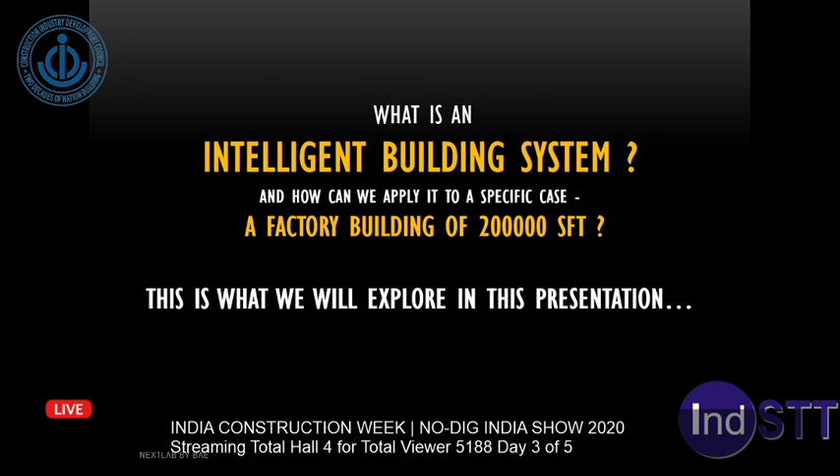Digital can be either operational or strategic. Operational is when we make small changes using digital technology in areas of rate analysis and quantity surveying or document management by having an ERP, etc. Or it can be digital which is the intelligent building system, a product of strategic transformation initiative.

And of course, with all things digital, even for IBS, data is king. For IBS to be created, we'll need to acquire, store, visualize, analyze, and process the data to create a rationale for engineering outputs that will be beneficial for the industry.

With an IBS, we can help construction companies save resources and increase productivity and improve project profitability and quality, reducing project duration and cost, lessening the complexity of project management, and enhancing site safety for promoting a sustainable development of the construction industry.

To understand digital transformation and IBS, therefore, it's necessary for us to take a look at where we are at the value chain of the industry and how the digital transformation is going to completely disrupt each link of the value chain.

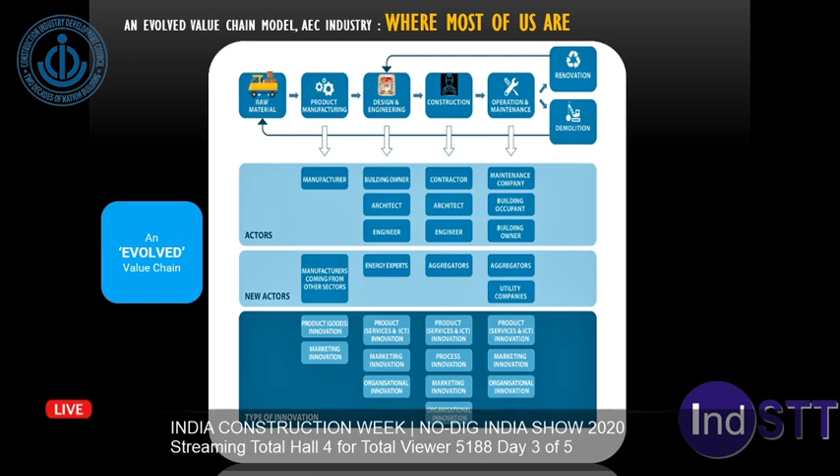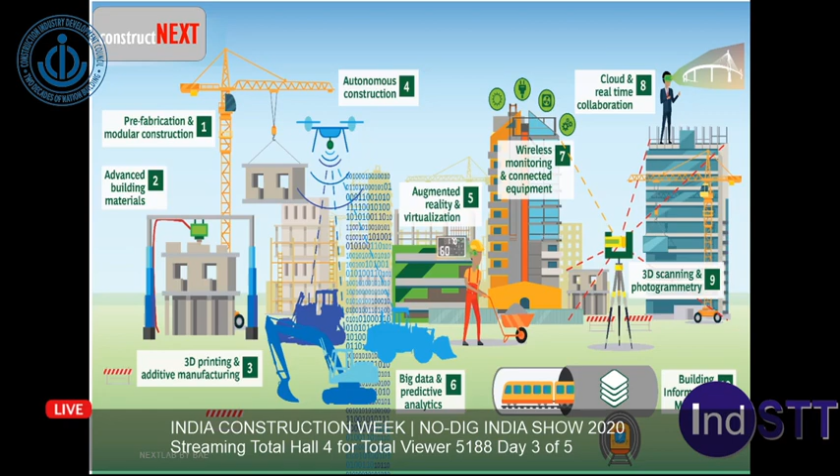There is prefabrication and modular construction, advanced building materials, 3D printing through additive manufacturing, autonomous construction, augmented and virtual reality, big data predictive analysis, wireless monitoring and connected equipment, cloud and real-time collaboration, 3D scanning and building information modeling, which will all contribute in no mean way to disrupt, create change in various aspects of the building industry, as you can see in the illustration.

Every man, machine, resource, component, building system, equipment that you saw on the slide earlier is a thing as defined in the Internet of Things.

So now that we have a brief introduction to what we are trying to achieve, let's create a conceptual framework for the IBS and design an implementation strategy for making it effective across companies and across verticals.

Many of the big five consultants, such as the Boston Consulting Group, have embarked upon very ambitious strategic transformation initiatives using digital technology. We have drawn from companies such as McKinsey Global, Boston Consulting Group, etc.

We used a very popular strategy implementation tool called the balanced scorecard, and used it to create our own version of a value chain transformation scorecard to determine how companies can, in a step-by-step manner, identify key objectives and convert those to measurable outcomes and performance drivers, creating a measurement scorecard for implementing a digital transformation strategy across their companies.

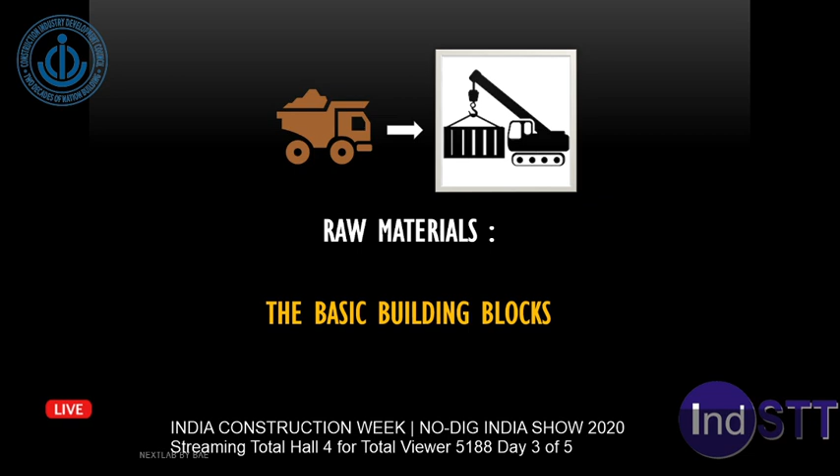As we said before, each link in the value chain undergoes a rampant digital disruption. We'll just look at the raw materials only because we don't have too much time, so we'll skip the other links. Let's look at the raw materials, the basic building blocks, and how digital disruption causes transformation in the raw materials and product manufacturing link of the value chain.

So how is the raw material link going to look in the near future? This is the raw material and product manufacturing component of the value chain, which is said to be disrupted due to Industry 4.0, digitalization, and various kinds of innovations from the various stakeholders.

Time is not very far when you and I will go to a supplier and ask for 10 footings, 20 beams, 10 girders, and so on. We have today prefabricated RCC components, bath pods, factories in a box, all created by new actors who want to shorten the time of construction in societal interest and increase the profitability and productivity of the industry. We're also converting these prefabricated components to smart construction objects, or SCOs, as we'll call them in the rest of the presentation.

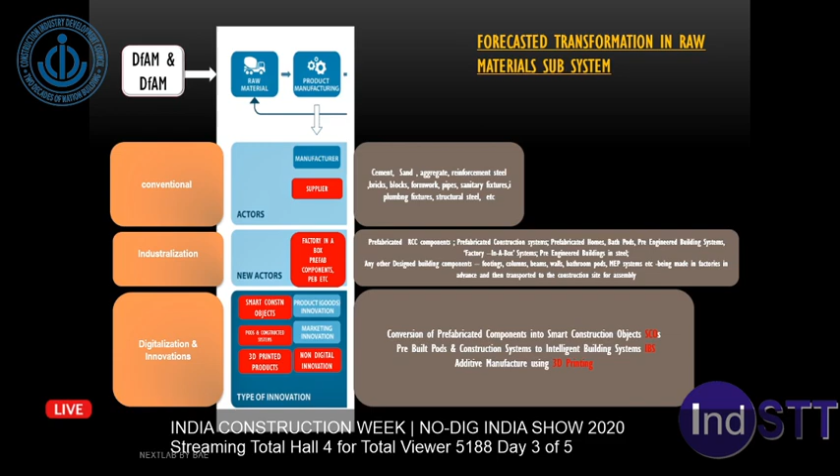Pre-built pods and construction systems are being converted to intelligent building systems using technologies like additive manufacturing or 3D printing to create holistic solutions within a matter of days as opposed to years or months.

The designers have to keep pace as well. Cement, sand and aggregate have transformed into bathroom pods and pre-engineered building systems, etc. So they've got to innovate and engage in the transformation through DFAMs - design for assembly and manufacture, and design for additive manufacturing.

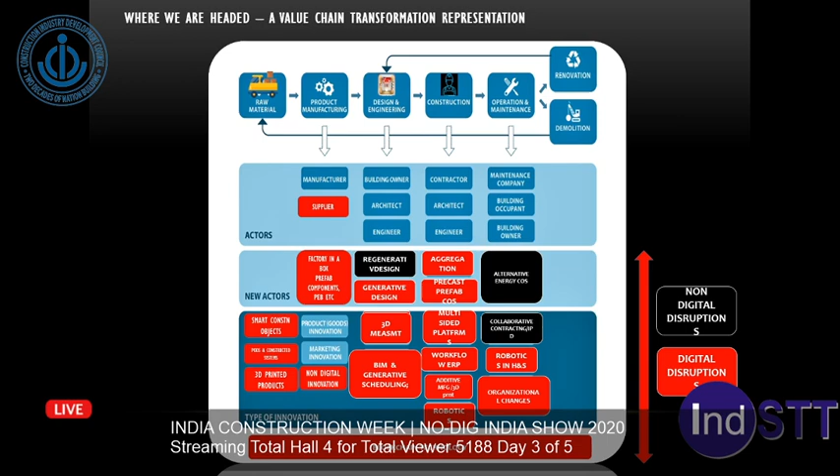Similarly, with digital revolution impacting all the other links in the value chain, the combined value chain of the industry would begin to look something like this. This is the value chain illustration of where we are going to be pretty soon - changes, disruptions, transformations across all the links: raw materials, product manufacturing, design, engineering, construction, operations, renovation, demolition, etc., through digital as well as non-digital disruptions.

We have so far rationalized the need for adopting digital technologies to transform our industries, our companies, our projects. Let's now look at this process of creating an intelligent building system for prefabricated buildings in stages through the following slides. Let's look at the stakeholders and also how this presentation is going to be organized hereafter.

First, a quick look at how the study is organized. First, we'll look at the technologies that are available to us. Then we create a conceptual framework of the intelligent building system. Next we create an operating framework for the intelligent building system, and then thereafter an implementation framework.

The implementation framework is across two different prongs. The first prong is a technology or technical prong. The second is a management prong, which enables you to outline the key objectives and draw the outcome and performance driver measures to ensure that companies take the transformation strategy seriously, and every department, every person in the company is measured in terms of how they are performing with respect to contribution towards digital transformation.

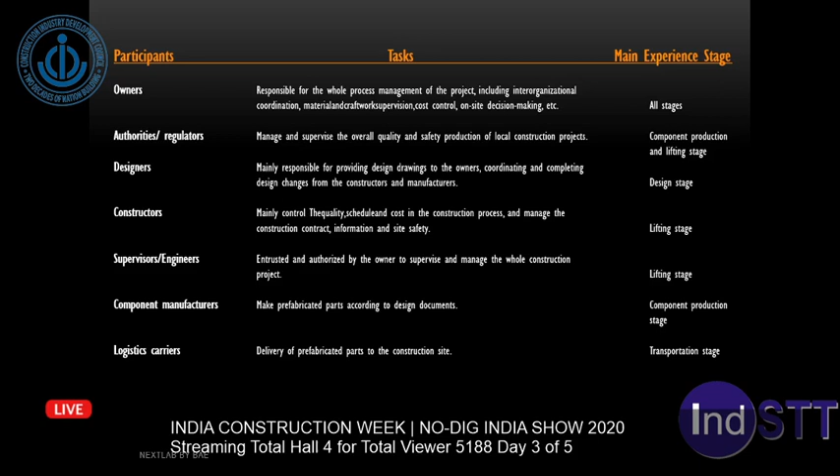Here's a look at the stakeholders involved in a prefabrication setup, the tasks or responsibilities they discharge, and the main stages where they will experience the impact of digital transformation through the execution of a particular project. So there are owners, authorities or regulators, designers, constructors, supervisors, engineers, component manufacturers and logistics carriers.

With so many stakeholders and so many possibilities of systems and subsystems, what are the digital technologies to be employed? In a prefabrication facility, prefabricated components are manufactured, such as footings, columns and beams. Components are then assembled into construction systems - this is the assembly level, the earlier one was the unit level. Then the constructed systems are integrated into the construction sites - this is called the integration level. There are three levels in a prefabrication facility.

Let's take a quick look at the different technologies involved at the different assembly levels. At the component level, we use IoT, RFID and GPS to track and position the raw materials and components in construction. At the system level, where components are assembled into systems, we use IoT and a BIM platform to trace the manufacturing process, optimize the manufacturing schedule, and analyze and arrest quality problems. At the construction site level, we have a concept of smart construction site by employing technologies of internet, 3D scanning, BIM, virtual reality, augmented reality, IoT, etc.

And through a BIM based field management model that keeps talking with the BIM platforms of the manufacturers and the contractor subsystems, we create a digital twin which has the same properties as the construction site.

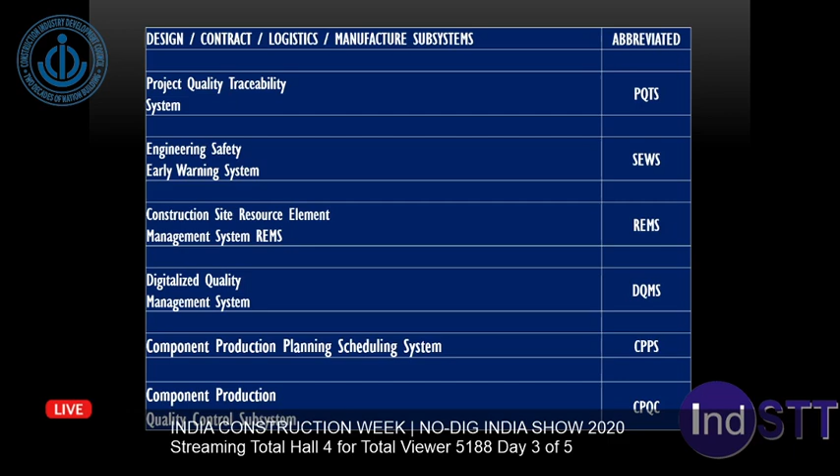A few more of those subsystems: material supply management, SCM, of the logistics operators and manufacturers; component transportation and dispatch system, CTDS; and the integrated design system of the designers, IDS, which subsumes the building information modeling system.

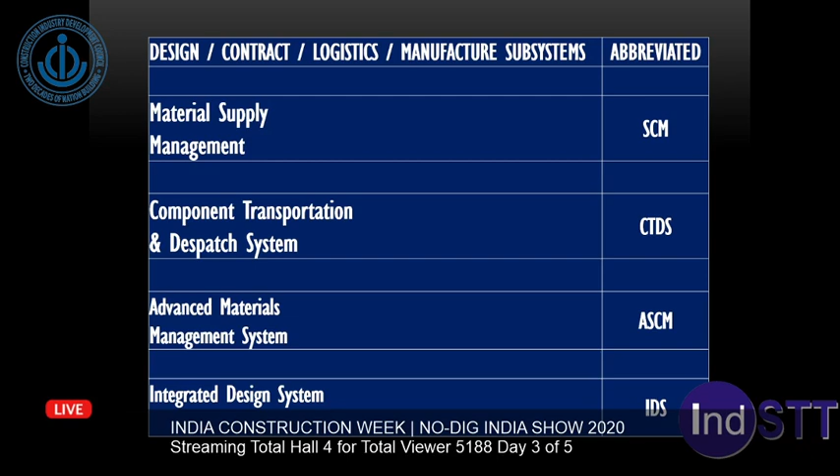In summary, therefore, the various systems employed along with the subsystems of the contractors, designers, and logistics operators would look like this.

We have PIC, IBDB, AMTS, and ISP, and a suite of subsystems running across the manufacturers, suppliers, designers, etc., compiling the big data we need for the creation of the intelligent building solution.

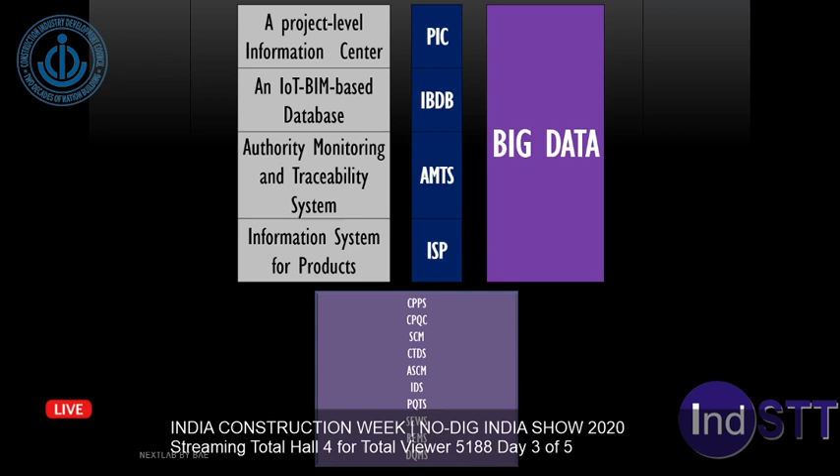Now that we've seen all this, let's take a quick look at the conceptual framework of the IBS. Here is how a conceptual framework of the IBS would look like.

As you can see here, the various systems — AMTS, IBDB, ISP, PIC, etc. — that we've seen earlier are depicted here, indicating very clearly the flow of data and information between the subsystems of the contractors, the authority regulators, and the owners.

The various purposes for which these systems are in place, and the roles and responsibilities of each set of stakeholders, are also loosely indicated here.

The objectives of lean construction — maximizing benefits, supervising and control, safety and quality control, and quality traceability, etc. — are very clearly indicated in this conceptual framework of the IBS.

The interaction between the project information center and the transmission of information back and forth across these different systems and subsystems, through networks of Wi-Fi, RFID, etc., is shown here.

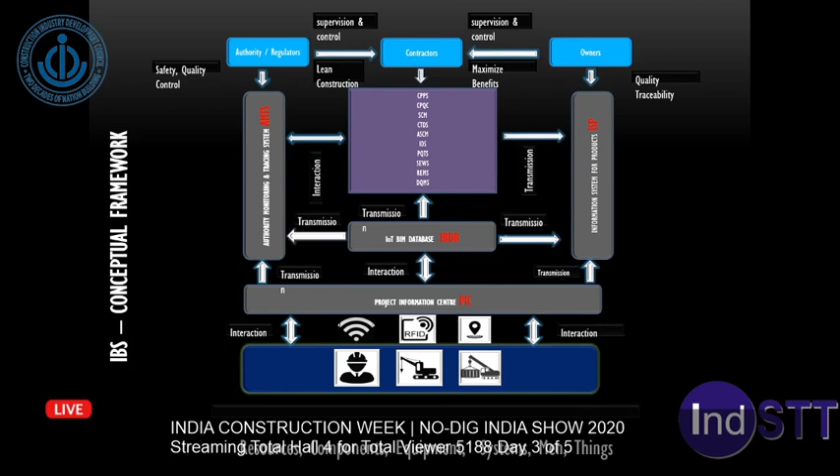And finally, the benefit to the construction site's resources, components, equipment, systems, men and things, etc., is also clearly indicated. So this gives you a basic or conceptual framework from which to develop an operating framework, and we'll see that in the next slides.

Let's take a look at what happens in the IBS operating framework. We create a design model subjected to analysis and clash detection, etc.

Once found compliant, a set of data is transmitted to different frameworks and sub-frameworks. So a construction-oriented design data is transmitted for on-site construction.

On-site construction data integration happens through the network of RFID, IoT, sensors, etc. A set of manufacturing-oriented design data is sent to component production data integration.

Component production happens in real-time, and data is uploaded back into the system. If it is qualified, it goes to the site for on-site construction data integration.

The data is analyzed and quality cleared. If no design conflict is found, the IBS is created and the project is finished.

If a change is required in the design due to a design conflict, that will be indicated, and the loop goes back into the design model, with the entire system rerouting itself as indicated.

A lot of technology-related interpretations are possible for such a framework, and it may not be within the purview of a typical architect or civil engineer unless you are very technologically oriented enough to delve deeper into this.

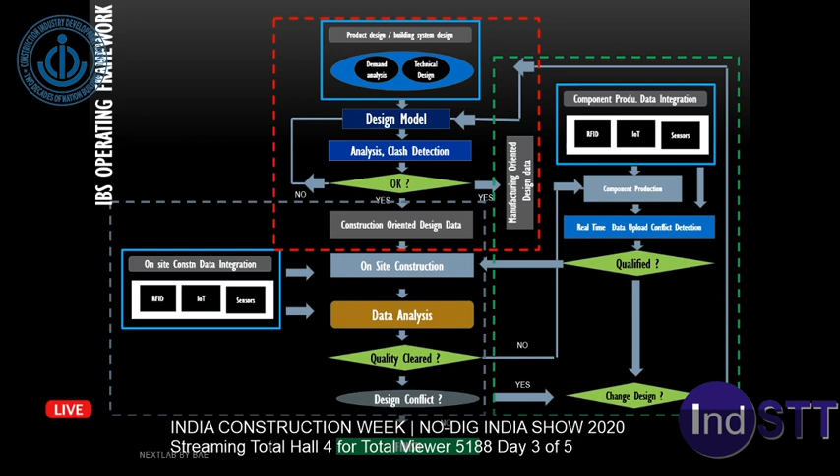We have used a system of aggregation of domain experts, bringing in the architecture and civil engineering part of it, and the needs of the owners, and then we aggregate the expertise from technology stalwarts to create a platform called NextLab to create solutions for the specific needs of our industry. The final step is creating the implementation framework.

We look at the implementation aspect in two prongs: the technology prong and the management prong. We recommend a simple 10-step plan to implement the IBS. First, you build the smart construction objects, or the SCOs.

Then you establish a data acquisition system, which we have seen earlier, the PIC, AMTS, etc. Collect data from the SCOs through the data acquisition system, which we have seen in the first part of creating the conceptual framework. Establish network integration system, which we've seen in the operating framework. Connect the smart construction objects through the network integration system, again seen in the operating framework.

Establish information integration system, and transmit collected data to the information integration system through the network integration system. We've seen the network diagrams through the operating framework. Establish data integration and analysis system, establish a visual integration system, and establish a multi-layered application integration system, which is the final output of the implementation.

The other aspect of IBS implementation is the management aspect, for which we create a value chain transformation scorecard. We've identified 10 different platforms for creating such a scorecard. Within each platform, we have key objectives, outcome measures, performance drivers, and we indicate the different technologies that are to be used and the different systems that have to be created in overall integration of creating such a value chain transformation scorecard.

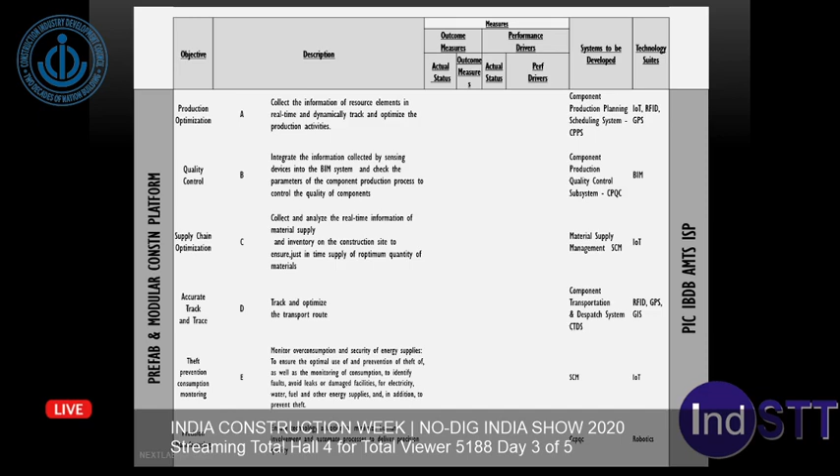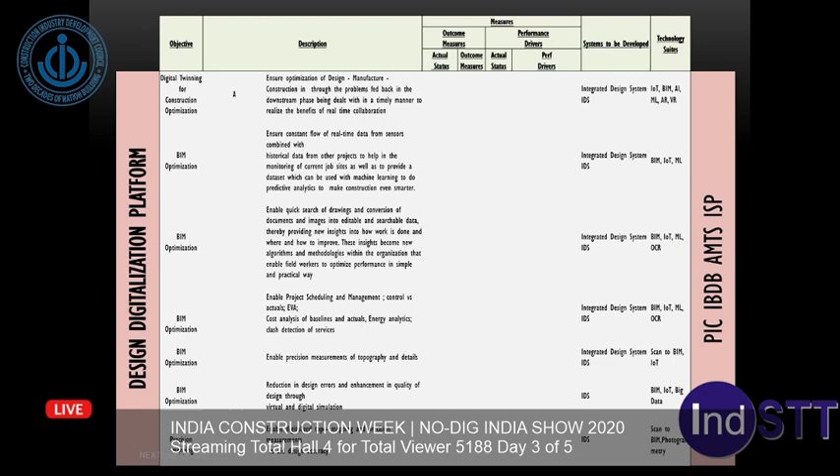So this is a template for the prefab and modular construction platform, whereas this is a template for a design digitalization platform. Remember, design digitalization does not end here. We have a separate platform for building information modeling, because it is building information modeling and Internet of Things that combine together to create the digital twin that is at the forefront of creating digital transformation in our industry.

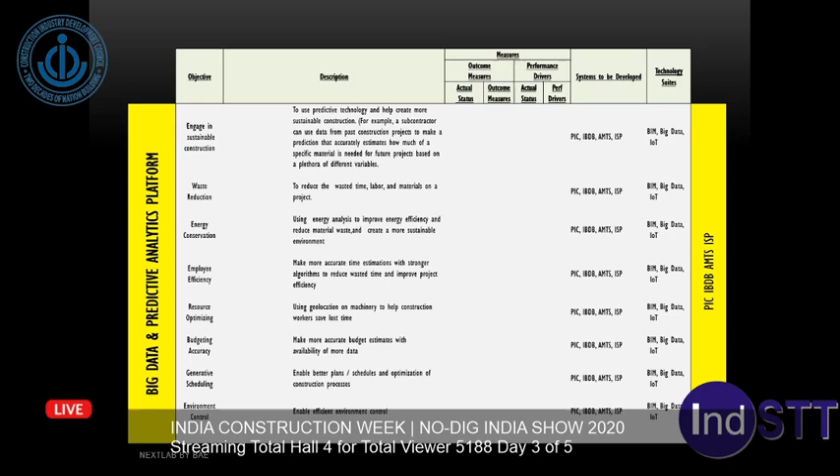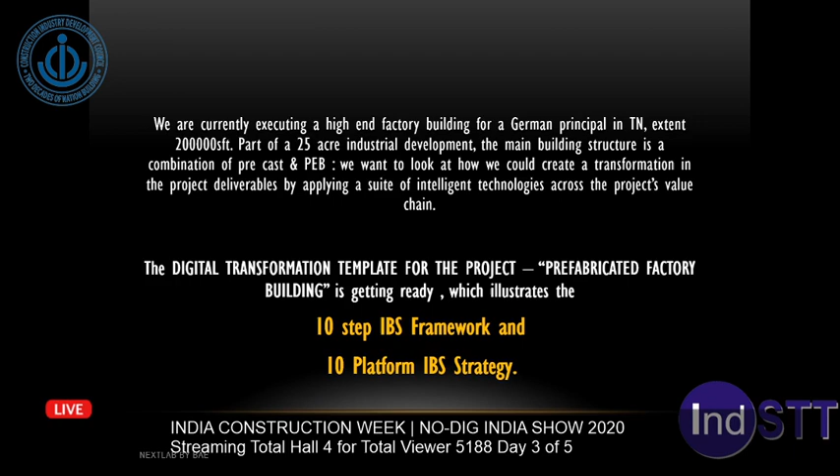Similarly, this is a template for an autonomous construction and digitalized construction management platform, and this one is for big data and predictive analytics platform. And as we speak, we are getting ready with the digital transformation template for a prefabricated factory building of 2 lakh square feet, which illustrates the 10-step IBS framework and a 10-platform IBS strategy.